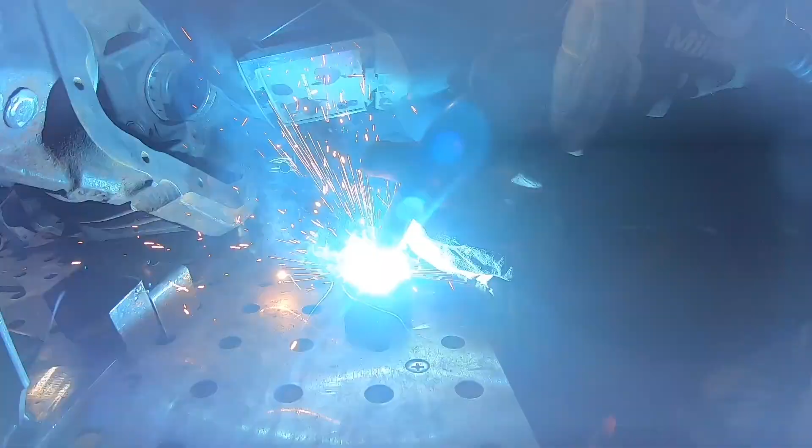Let's go ahead and power the machine on. Power button in the back. So we're gonna let the machine power on. The fan's gonna run for a little bit, 30 seconds maybe. And we'll talk about some of these settings here. So first of all, right off the gate, you have 220 or 110. What you're plugged into, it's gonna tell you right here. So I'm plugged into 220.

Next, you have your mode. Your mode is gonna set your different welding processes. So MIG, stick, TIG, spool, and MIG. We're gonna keep it in MIG. This button right here is your MIG operation. So pulse, 2T, 4T. Basically 2T, you're gonna pull the trigger, hold it down, let go, stops welding. 4T, you're gonna pull the trigger, let go, and it's gonna continue welding until you pull that trigger again.

And then pulse. So now we put the machine in synergy or synergetic mode. When it's in synergetic mode, this is how you can change your wire sizes. So MIG, 40, 23, 30, and 35. So we're gonna be running it in 035.

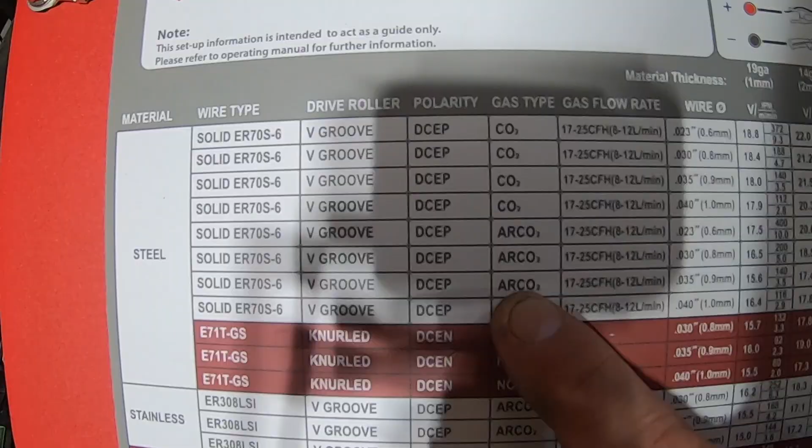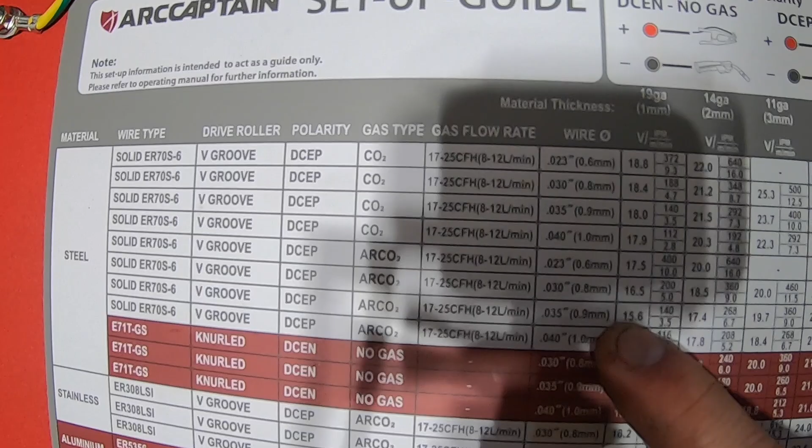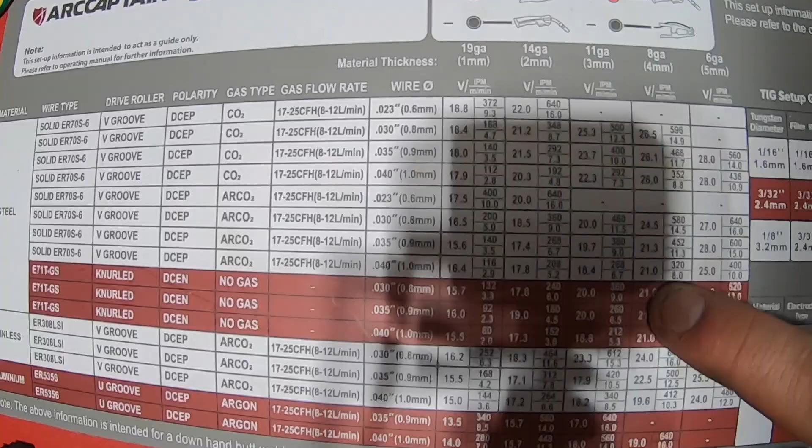Wire type running 70S6, V-groove, DC positive, argon CO2 mixture, 17 to 25 CFH on our regulator. We're running 035 wire. Now this is where I think stuff gets a little weird, and I don't really like to follow it. But if we just go 8 gauge material thickness, it's telling us to run at 21.3 volts, 452 inches per minute. That seems high to me.

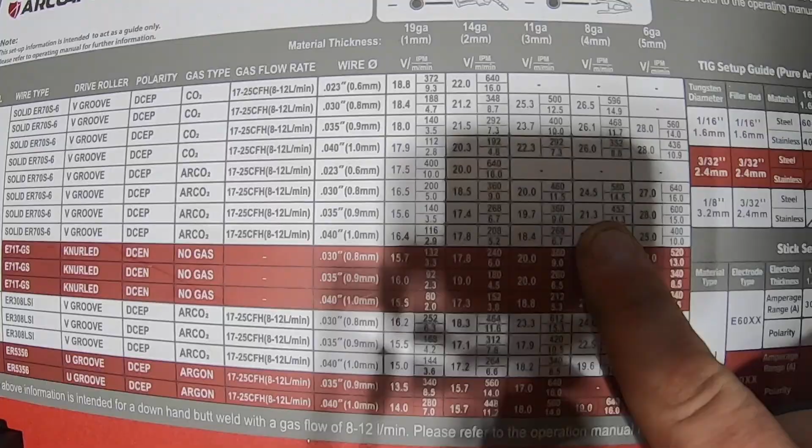So you guys can go off of this chart and just set it up on your machine to how that chart is on the side, or find a Google calculator or the Miller app or something and set it off of that. And make sure you run practice beads before you do it.

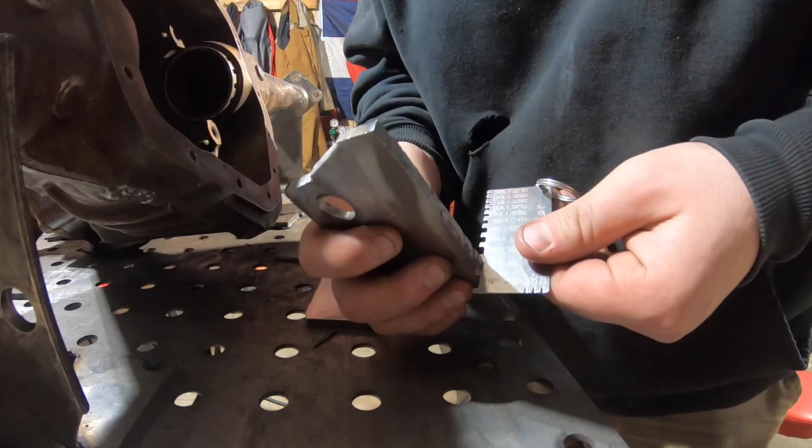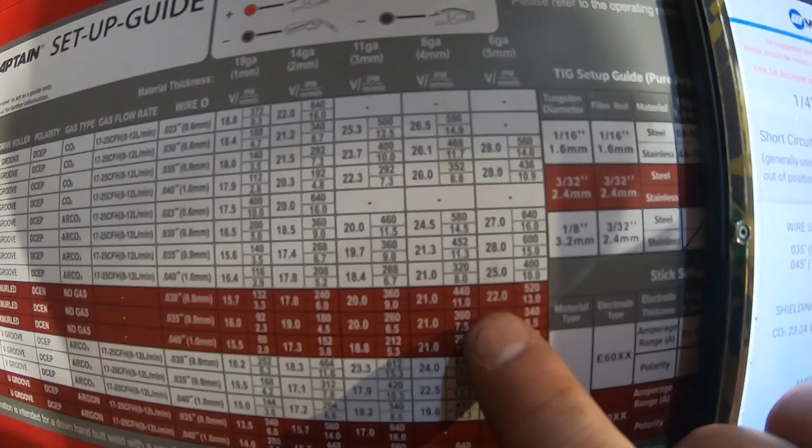All right, so I cut up some 1/4 inch plate. So let's go see what the machine says to run for 1/4 inch. So 1/4 inch converts to 6 point something millimeters. This wants us to run 28 volts, 600 inches per minute for 5 millimeter thickness. Let's give this a try and see how it goes.

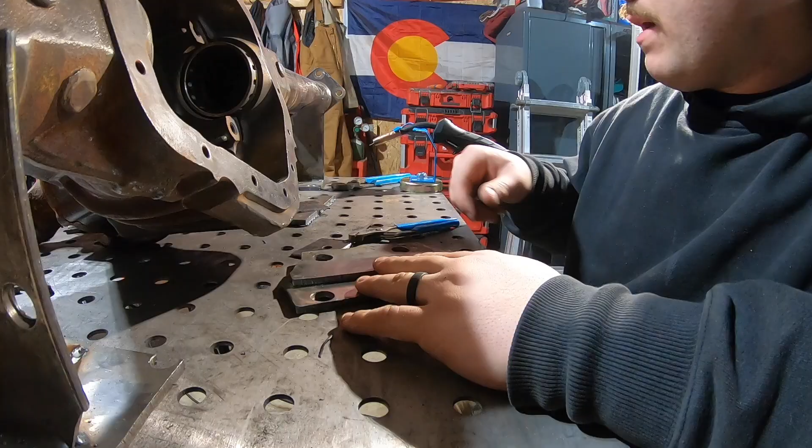All right, so a couple of things before you even start welding. One, make sure your material is clean. Get rid of all the mill scale. Mill scale is that dark color stuff on top of your steel. Get rid of your mill scale. Clean up your edges. These are not the best, but clean up your edges. Bevel if you have to. Like if I was gonna run this, I would bevel it, run my root, and then run 2 overlays over the top. But I'm just gonna do a T-joint. We'll run it like this.

Another important thing to do is your wire stick out. What I like to do is take my welpers here, put it at the tip, and then whatever that stick out is the depth of here. So yeah, those are 2 things to start. Make sure you have a ground clamp. I'm grounding to the table. It's probably best to ground to your piece, but for this demonstration, the table will work fine.

All right, so I just went ahead and tacked these in. Now let's run a bead. I want to be pushing instead of pulling. I want that gas shooting out in front of me. Let's go ahead and run a bead on here and see how it sounds. You should be listening to, not really a hissing, like a crackling bacon type sound.

That's hot. That's hot and fast. That's with the Arccaptain settings. Alright, so now we're running the Miller settings. Here are the Miller settings: amperage range 180 to 190, 21 to 22 volts. We're doing 1/4 inch plate.

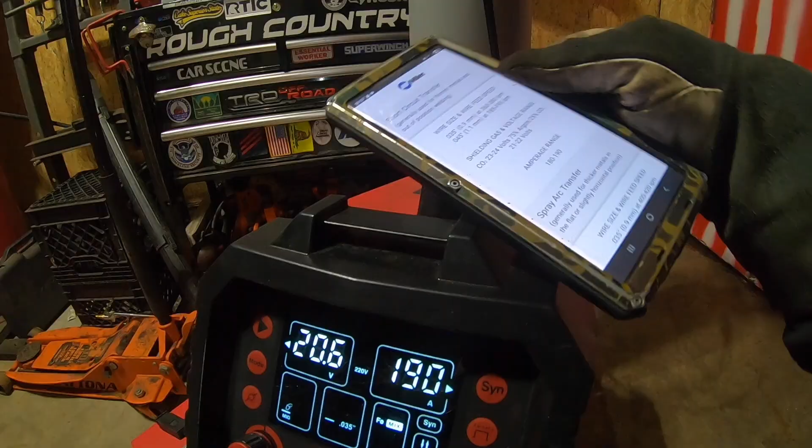And what's cool about this machine is if you go to adjust your amps, it adjusts your volts as well. So the Miller app says 21 to 22 volts. That puts us at about 190 amps. So you're not far off from what the Miller app is saying. So let's put it at this setting. Let's weld with it and see how that turns out versus our 600 fucking inches per minute.

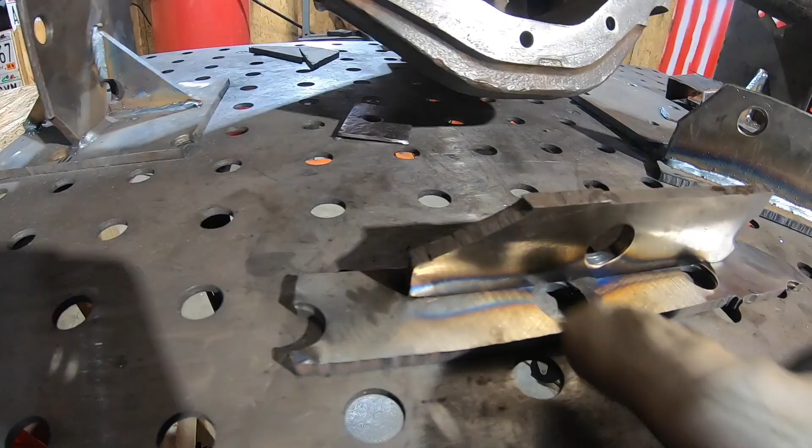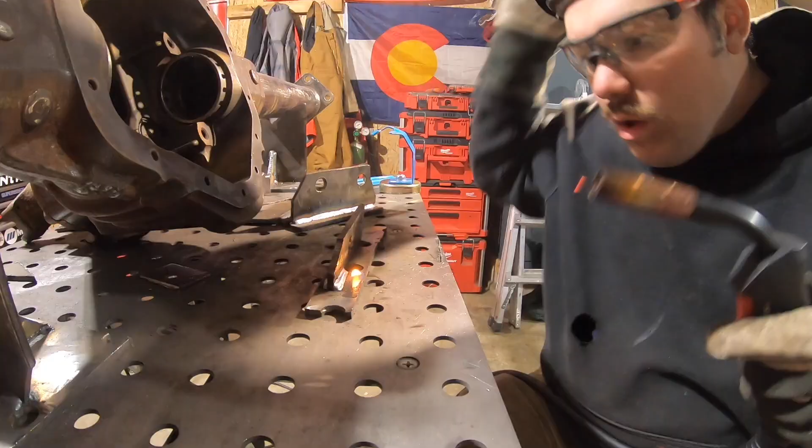Now I'm gonna turn up a little bit. I like to burn a little bit hotter. So I'm gonna go up a little bit on my amps, probably to like 210, 215, and we'll burn it. So we ran the Arccaptain settings. We ran the Miller settings. Now this is what I like to do: 22.2 volts, 215 amps, 409 inches per minute. Let's run it.

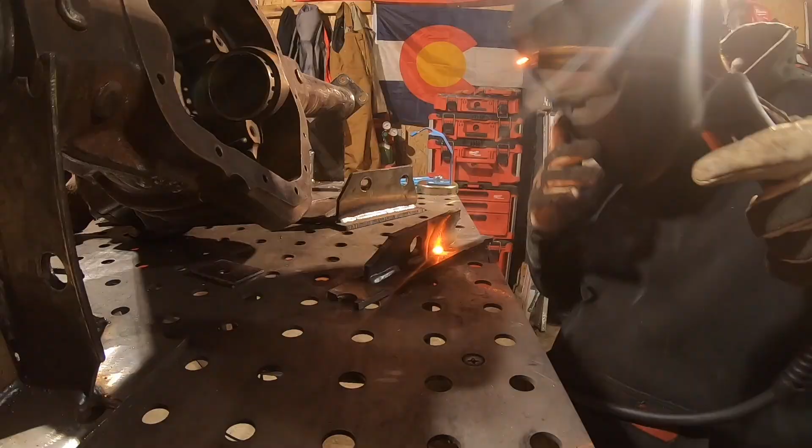I think that one sounds good, looks good. You guys can correct me in the comments if I'm wrong, but those are the settings I like to run. So this is the Arccaptain settings right here. That's not a bad bead actually. I just feel like we're burning way too hot.

This is the Miller settings here, and these are my settings that I like to run. I like to run a little bit hotter than Miller. I would maybe even go up to 220, 230, pushing that 450, 500 inches per minute. So let's go ahead and run some 1/8 inch now.

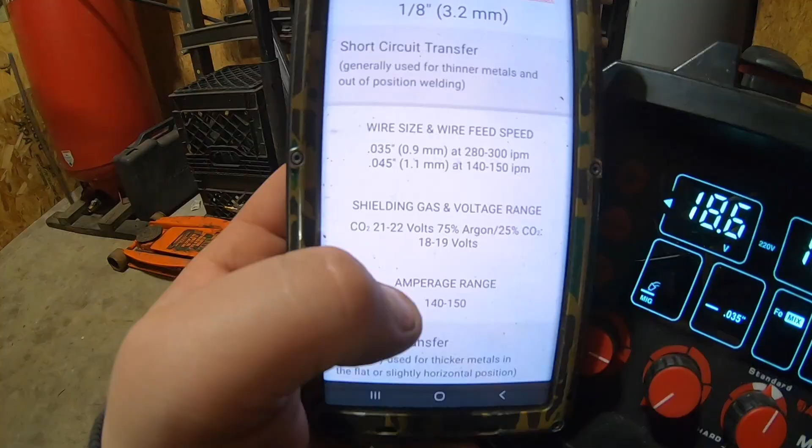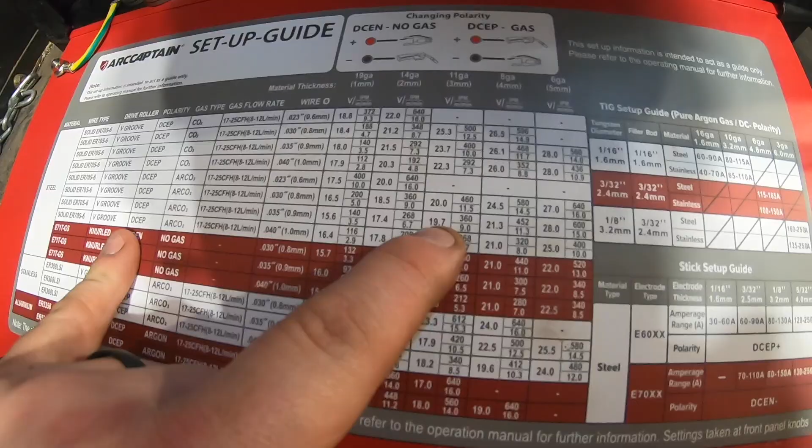We're working with 280 to 300 inches per minute, 18 and 19 volts, 140 to 150 amps. So 1/8 inch is about 3 millimeters. So right here, we'll go to 035, 360 inches per minute, 19.7. That's not horrible. We might have to bump it up to that. We'll see how it goes. It just seems that this chart runs a little hot for what you actually need.

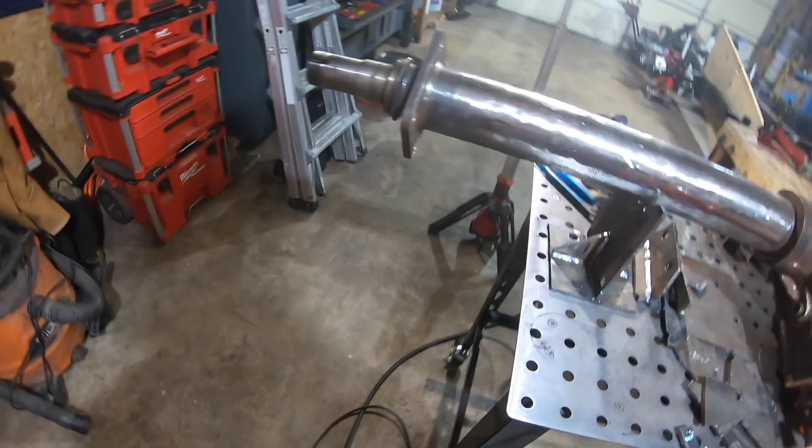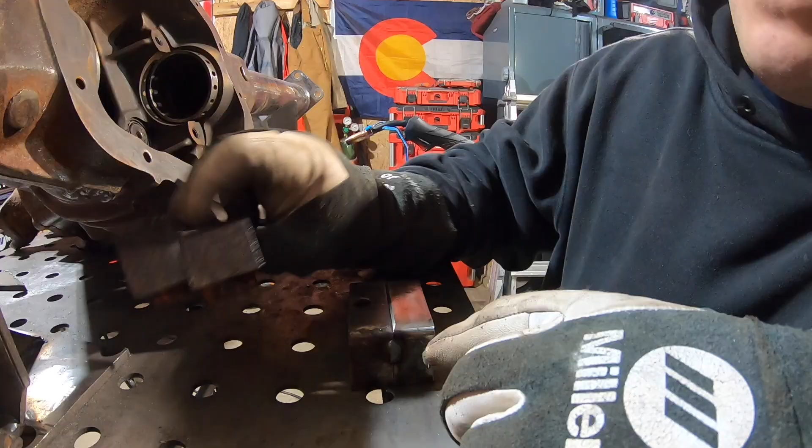All right, now this is the kind of stuff that you guys are probably gonna be doing at home. This was just an old trailer frame that I had laying around and I cut up. I did build the rest of the trailer, but this is old metal, something you're gonna find on a trailer frame or some hobby stuff. It's 1/8 inch. I beveled it ever so slightly, so let's go ahead and run a root down the middle of here and see how this welds.

I like the sound of that. It sounded good. It laid down really well, really nice and flat right in the middle there. I don't know if you guys can see that or not, but it laid down really well. Filled that root in nice. Definitely got penetration on the back side. Yeah, I think that welded that 1/8 inch nicely.

That was at 18 volts, 150 amps. And I'm happy with that. That would smooth out nicely if you're doing like a frame or auto body or something. This is 1/8 inch, but it's old, shitty, dirty 1/8 inch, and it welded it perfectly. All right, so we ran 1/4 inch. We ran 1/8 inch with the Arccaptain MP 250.

Again, I think I said this in my last video of the Arccaptain, the settings on the table just do not make sense to me whatsoever. Like 600 inches per minute, 28 volts is crazy. Yeah, sure, the bead looked, I guess it looked nice. It laid super flat in there. But I think you could turn that down to like 500, 450.